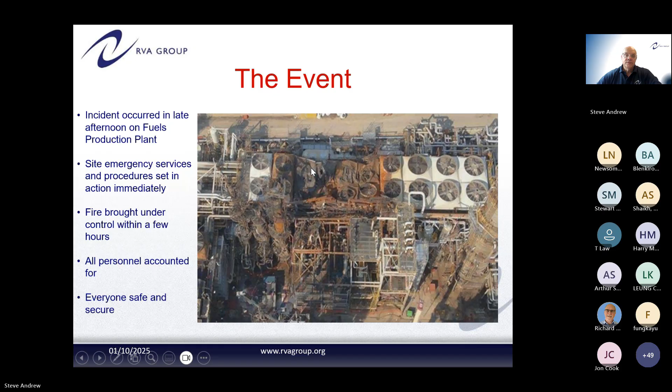So the first steps, the client contacted us. We were called out to see them, and we helped develop the roadmap through this. You can imagine there's a lot of pressure to deliver.

Some of the challenges: this was slightly different to a lot of projects we get involved in, where we're trying to take plant and equipment from an unknown to a known condition, whether it's been decontaminated, washed, cleaned, or whatever. Here, we knew everything was full of hydrocarbon because of the potential unstable structure. We had no access, so decommissioning was very difficult. And certainly a positive was there was no asbestos. If this had been heavily contaminated with asbestos, it would have been a very difficult project.

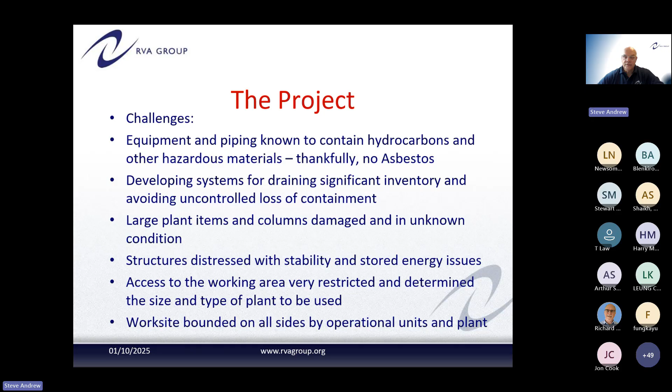We had large items of plant and equipment. We had 3 columns, which again raised questions of structural integrity, distressed structures, potential stored energy. What was the effect of hydrocarbons being heated up significantly? And we were bound on all sides by operational units and plants, which I'll show a little bit more later in the presentation.

So planning for any event: what's the worst thing that could happen, and what contingencies do you have in place? How do you isolate an area if there's a fire? And have you checked the valves in the system still actually work? We've been in situations in the past where we were looking to do boundary isolations and the valves had never been closed since the day the assets were installed. So is that still there?

How could you do a temporary shutdown, drain, degas, make the area safe? Does your critical equipment still operational? You can imagine with a fire like that, the control systems must have failed. So then what's actually happening inside the columns, for example, and your tube bundles. Do you practice and do drills? What's part of your scenario planning? Have you had a fire in the middle of the block, and how would you handle that?

The important thing is getting the right team together. This is not just about process. You need senior manager and business line buy-in. There's a big commercial element here. You can imagine time is the driver, not the cost. But this is not a blank check, so there needs to be governance in place.

You've got your health and safety and environmental protection, and then you're touching on all the operations on the site: operations, engineering, projects, maintenance. And then there's the outside, like public relations, dialogue with external regulators who come in. Basically, a lot of the regulators we were involved with here had never been through this type of thing before, so we had to educate them and help them work through it. And also your suppliers, getting them involved. As we go through this, if we didn't have the camaraderie between the client, the contractor and ourselves, this project would have been very, very difficult.

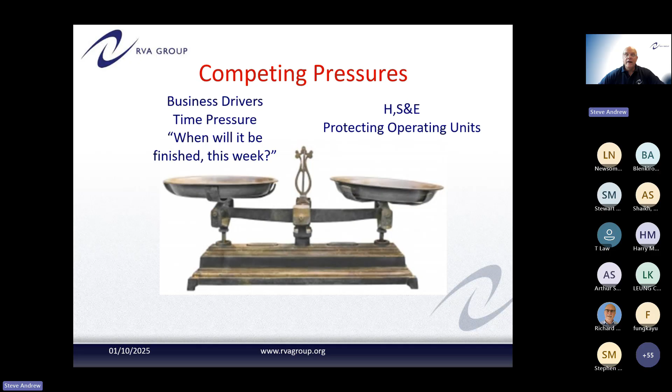On the other side, you've got the operational side who are focused on protecting the operating units and the health and safety and environment of the people undertaking the work. Certainly I saw one of my roles as depressurising that best you can. So just keeping that under check - get a program, get a process, and follow the process. The process might change every day, which I'll talk about as we go through. But it's important that you keep people calm. I never thought my boring nature would come in useful, but let's not go there.

Starting the recovery, I remember sitting in a meeting with quite a few people in there, and it was quite emotional. Probably the first words I said were, hang on a minute, let's just put this in perspective - no one got hurt. The worst thing that could happen now is we hurt somebody, we have an environmental release, or we have an impact on a neighbouring unit. Because if we do that, you will not hit your program. And if you have another fire, the regulator is going to show a lot of interest, and that's going to stop everything. So let's focus on keeping people, the environment, and the assets safe. And it brought things down.

The completion of the dismantling work, again as part of the process - what's coming out of all this? Well, do you need to keep anything for the investigation? Never thought about it. So again, looking at the investigation, getting to the root of what happened - why was the fire there, but why did that asset fail?

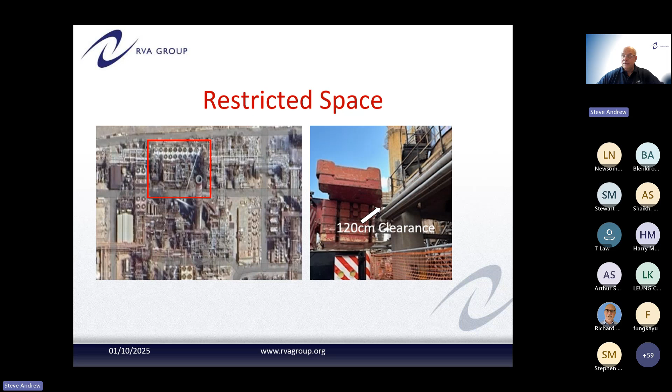So to control it, we had a daily meeting at 7 o'clock in the UK, 9 o'clock, and then in the afternoon, and we talked about what did we learn yesterday? Are the systems and procedures that we've put in place still relevant? We're working in a live operational plant - do our systems still control? Is there anything that's going on that's changed since yesterday that's going to impact us?

So it's not just about protecting the demolition and the live equipment, but can the live equipment affect the demolition as well? It was difficult - it had to be very patient. And we were incredibly lucky with the demolition contractor that we used, Despe. To be fair, the operational team were probably the most cooperative I've ever worked with, because everyone really did have a common goal, and it worked.

So obviously with the electrical and control and instrument systems, we had a discussion around this, and I said, okay, what are we doing about this? Well, everything's burned through, so everything by default is isolated. Okay, so looking at a bit of risk management - can we honestly say there's not one 24-volt control cable among that lot that's still live?

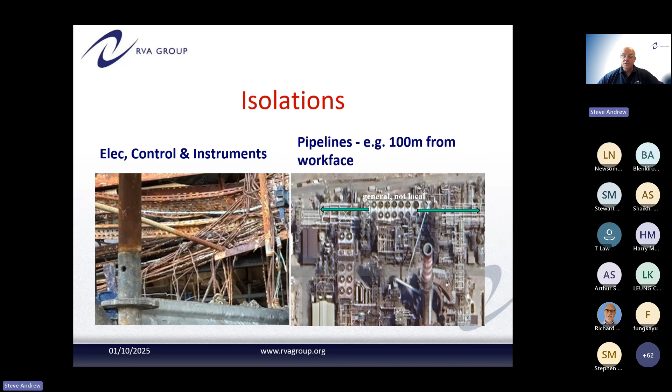Emergency preparedness: we were obviously working within a live plant. So we basically put Harris fencing around, and had to allow access in some areas which we controlled on a daily basis. Around traffic management, we closed the road for the duration.

Just putting things in perspective, the site on the left-hand side was producing somewhere around 4.5 tons of H2S an hour. So we were in a really interesting place.

We used a crane and the fly system, which I'll talk around, and an excavator to start with. Now obviously, when the operators are working, the focus is on what they're doing, and there's potential for them to move back.

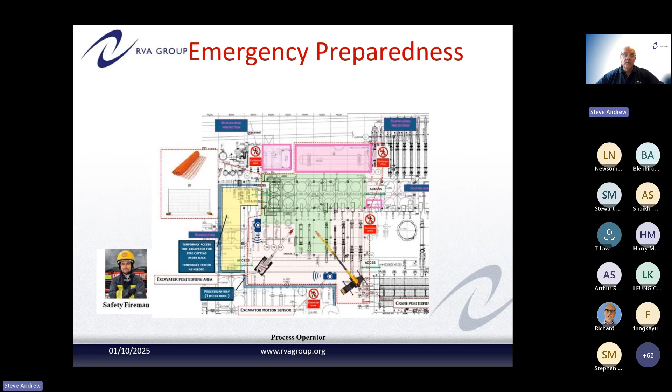Obviously there's still a serious risk of fire, so we had standby firemen in attendance. We had 3 process operators keeping an eye on things. We installed vapor monitors around the perimeter of the site, both at ground and at height. We also had Daleks - mobile monitors as well - where we were moving around into areas, and then the fire brigade on standby.

What a good job that must have been. Sat there for 6 months watching us.

The site process drain ran under the site, running away from left to right. We did think about blocking it altogether, but what we decided to do was block it as it came onto the site, so we weren't getting any ingress from anywhere else. That gave us an opportunity when we started draining lines - which you can imagine was very difficult - that anything that did spill would then go into the process drains and through the normal decontamination process.

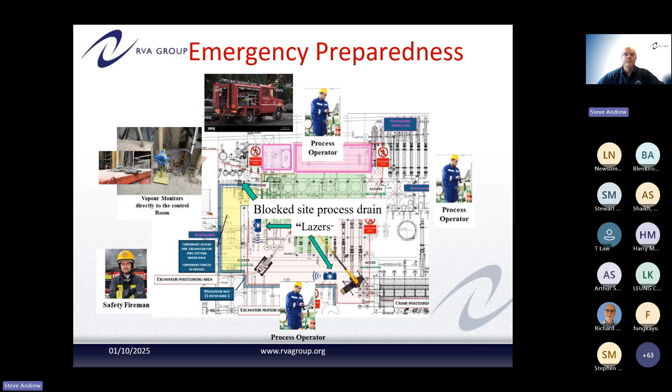So obviously we had no access underneath, so we used a remote control Brokk with a water jetting system, and hopefully the video will work.

It's all done remotely. We had a remote control front loader as well, so we put the IBCs in. We captured as much as we could. We put neutralizing agents onto the ground, and then any other overspill then went back into there.

But as you can see, it was quite a messy project. But we had no physical access to this part of the site.

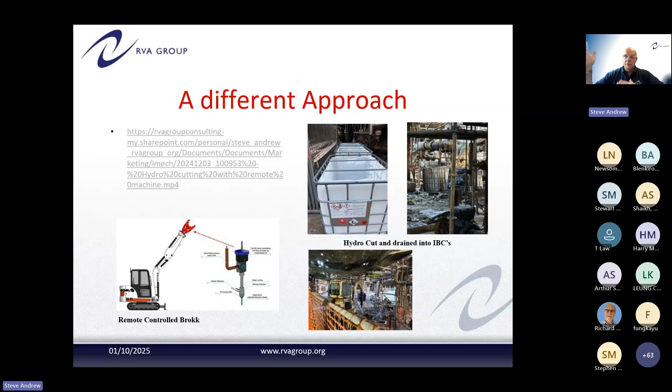It was okay draining at both ends, but what you've got to remember is that because of the fire and the heat, all the lines sagged between the columns. So in between every set of columns you had 100 plus low points. So we had to go through this process to basically remove as much as we could.

Despe came up with a really good idea around hot tapping. Basically use a normal hot tap, drain and pump out of the lines as much material as we possibly could, then remove the hot tap, fill the line with foam, and cut through the foam. That gave us enough time to lift lines down that still had hydrocarbon in, but both ends were sealed so we still had containment.

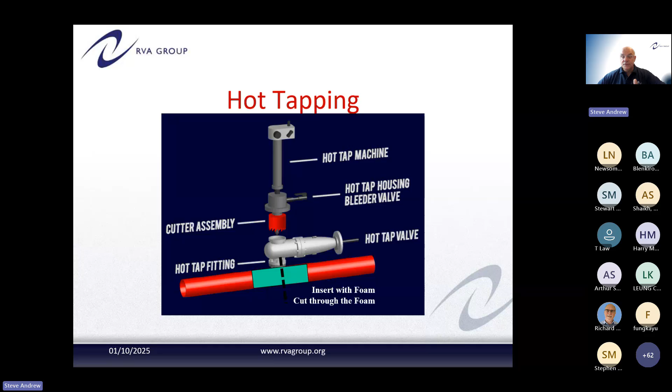The fly system - when we saw this, we were a bit like, okay, I'm not really sure how that's going to help us. But because of the access issues and the lack of space, it really did help us with the first cuts.

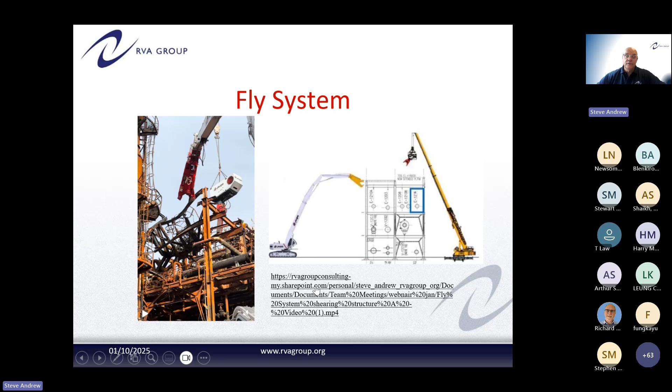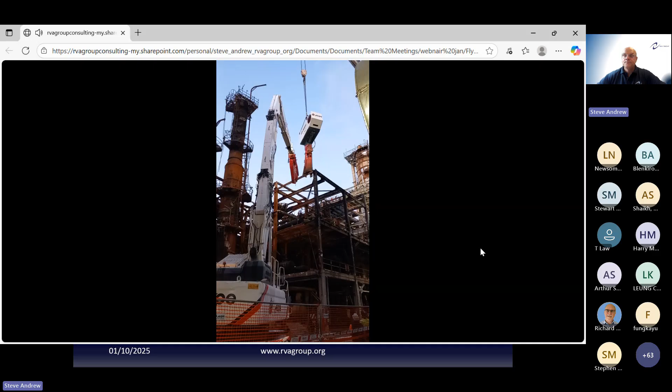There's just no room for an excavator. We had one excavator which holds or cuts. The other one would either cut with a fly system or a hold. So again, really good process.

We then used a similar process with the columns. There was a separate access which they used to use as part of maintenance, as part of the recovery of getting the plant up and running. That access was lost through putting the lines in - the transfer lines from the jetties into the rest of the refinery - so we didn't have that access. So we only had a very small area, and this was basically a first for anyone.

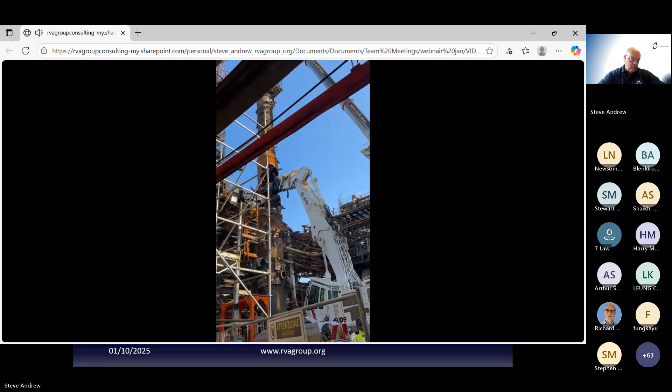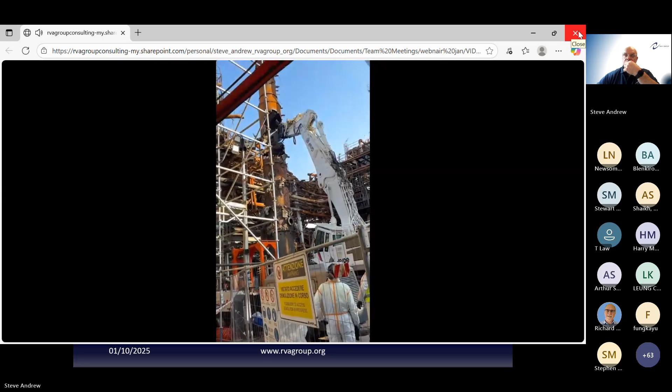So we had quite a debate on this, and the only reason we approved the methodology was because we had a 400% safety factor. We were fairly confident on the weights of the vessel, but we didn't know what the effect of the fire was, and we had really restricted access to do any investigation, so we just completely over-engineered everything.

Water suppression was an interesting one. We had a 2-hour discussion around whether we should be using a mist, a fog, or a jet. At one point I said, well, is a fog or a mist the best idea? Because we can see the static that builds up in the cloud, for example.

So we came up with the solution of a jet, and Despe modified a cement mixer to use as the medium for getting the water right onto the cut. We've all seen demolition projects where they're trying to control dust, and there's someone stood with a fire hose, and in reality all they're doing is making a mess. This was critical, because even a shear is classed as a cold spark and cold work, but you do get a spark. Any cutting causes friction, so we were very conscious around controlling that.

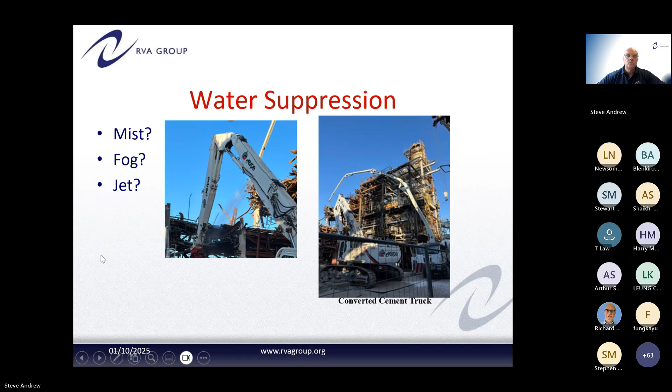Identification - you've got 130 lines. Once we started cutting, it was very difficult to identify them. We had site drawings, but were they 100% up to date? I normally say an as-built is a wish list by a designer, and what was done might not be the same as what's actually out there.

So we were really lucky - we had a couple of process operators who'd been there for 30, 40 years who knew the plant inside out. As part of our planning, before our 4 o'clock meeting, they'd go up in the MEWP, in the basket, and we'd check which lines we were going to be working on, whether we needed to do anything else, because there was caustic in there, for example. We needed different PPE - so again, that good information.

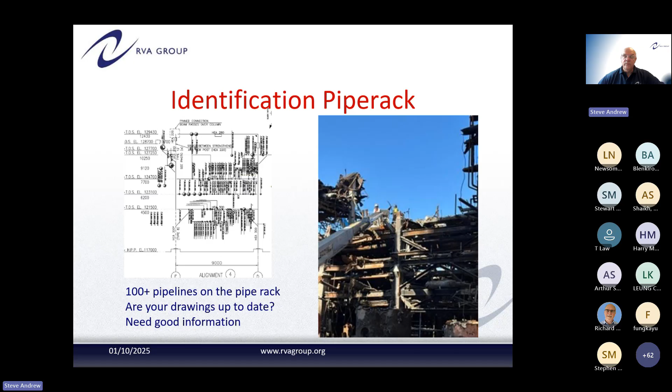And the project in numbers: we delivered in 125 days, over 7,500 man hours on site, no incidents, no sim-ops, no injuries, no impact to live plants or equipment, and certainly no off-site complaints.

So why did it work? Despite the business pressures, everyone bought into the fact that HSE was the number one consideration. We had a can-do attitude, and we had senior managers in the meeting - I was there as a director. We had the area operations manager for the client designated full-time to the project, and every day we were on site we had a director there from the contractor, so we could make decisions as we went through.

Every day we went through what we'd learned that day. Is our paperwork, our risk assessments and mitigations, robust enough for what we're going to be doing tomorrow? Do we need to do anything else? And there were no egos in there.

The person who probably got the most stick was me, but that's my Greekish - which is Greek English accent - wasn't the best, apparently. Communication was unhindered, and everybody worked hard.

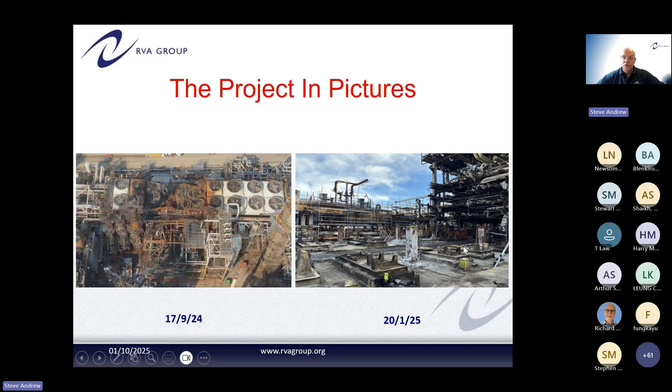Okay, any questions? Back to you, Richard.

Thanks, Steve, very interesting. I might just add a few extra bits around that as well, because we've obviously concentrated on when you were given it as a project to do the job. But as a chemical operator, there's a few front-end steps, I think.

Perhaps if I just share a couple of things with people. The first thing you need to consider is risks. Steve has rightly talked about health and safety risks, but there are other ones as well. So a risk register is a damn good idea.

Clearly that was a fire, but places make business decisions to close facilities as well, and that can involve people leaving, reputational damage, whatever it happens to be. And then decommissioning - I was on a plant in 2019, it took us about 9 months to decommission it properly, and there's risks involved with those.

Risk is typically probability times consequence. So you need to write these risks down, what could trigger them, and what your contingency plans are. And then the demolition itself - there's a whole bunch of things. I got these out of the BS standard: uncontrolled collapse, health risks from chemicals, fire, asbestos, working at height, falling into vessels, vehicle collisions, RTAs, electrocution, all sorts of things.